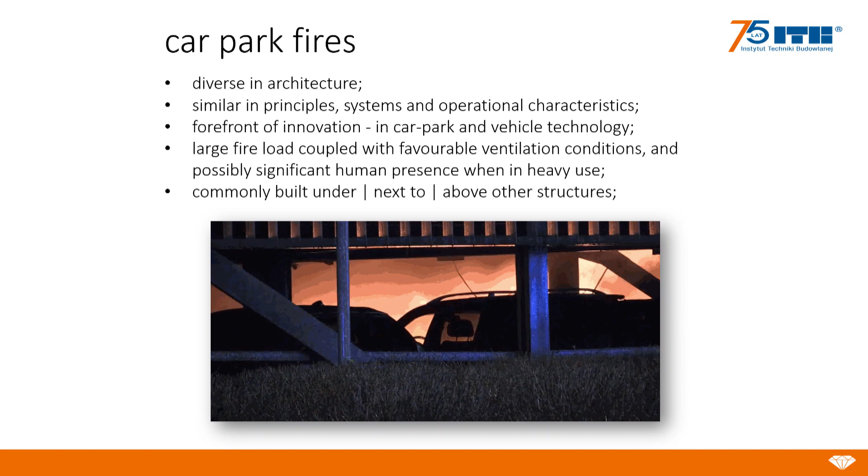Okay, so I like car parks a lot, outside of the fact they pay good. There are some interesting aspects of car parks. If you think about the car park, they all look the same - they all have the same role, more or less the same thing, copied and pasted over every building. So you could expect the fire behavior or challenges related to fire in car parks would be something universal. But it's not. Car parks are really exciting because very tiny, unique features of each car park make the challenges within it very unique.

The fact that in one car park you have the entrance on this wall, on the other you have it here. You may have two entrances, the way the core of the building is positioned - in the middle, at the wall. Is it rectangular? Is it square? How tall is it? What type of structure underneath the roof is there? Are there any changes in the shape of the roof? These all seemingly tiny details make the whole thing completely different in every car park.

So in the end, you are dealing with a space that's actually quite complex, and out of this complexity you have to deal with the complexity of fires within.

The second thing about car parks which is kind of difficult: if you think the role the car park has is for vehicles to be there, and vehicles emit fumes, you don't want to be in an environment contaminated by fumes from vehicles, so they, in essence, must be well ventilated. So we have created a perfect space where you have a confined space which is extremely well ventilated.

If I was a fire, I would choose this space to live in because it's perfect for a fire. So the exact things that make car parks good for the purpose they need to serve are the exact same things that make it great for the fire to grow in.

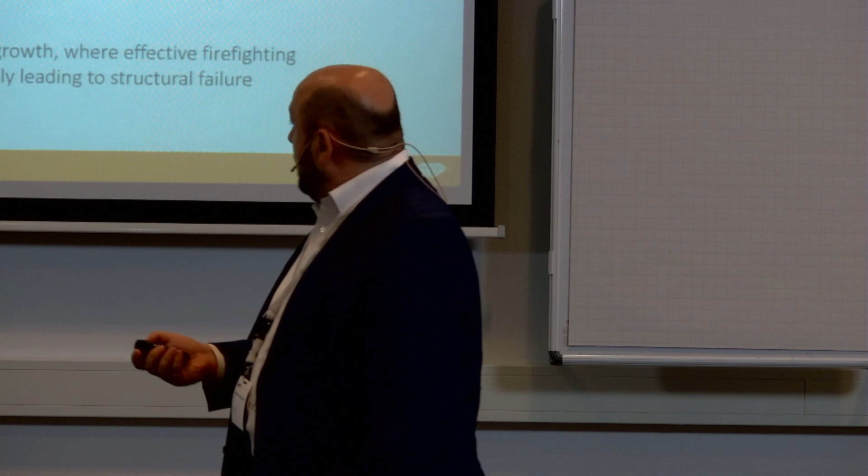Cork fire in Ireland, shopping mall - destruction of the car park led to closure and destruction of the shopping mall, 100 shops closed, major disaster for the local community. Stavanger, Norway, a big car park near the airport, massive economic loss because of hundreds of cars burned. And in Norway they have nicer cars than in Poland, so much more losses there.

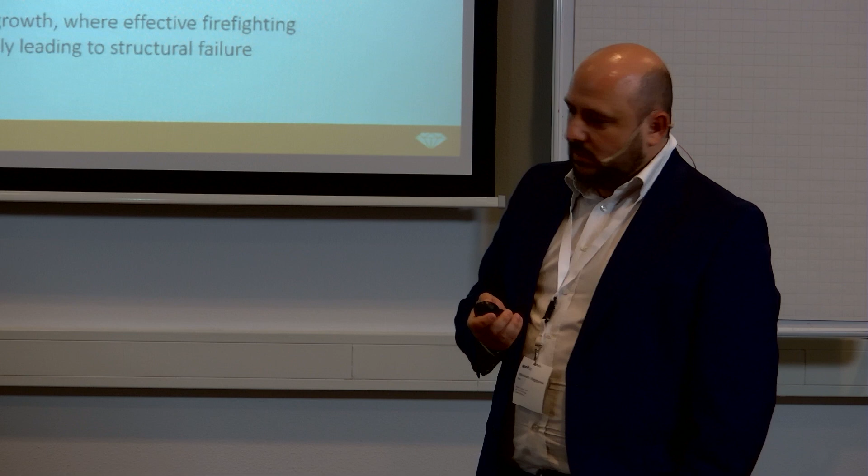And we also had one in Warsaw 2 years ago. It was underneath a large residential building. It happened at 5 a.m. in the morning. They evacuated the building, and people came back to that building only about 2 months ago. They left the building 2 years ago, and for 2 years they were in hotels in other rooms because it was not possible to go back. The destruction of the structure of the building was so profound.

It's actually a miracle they've managed to secure it and refurbish it to the point where it's structurally sound and can be used. And this was a huge demonstration of how stupid fire engineering can be. In Poland, there was a law that if you have a 1,500 square meter car park, you need a fire alarm and ventilation. Guess what was the area of this one? 1499, of course.

So yeah, unfortunately we now have proof that this risk is not something you can go around. It is a true risk factor in your building, and you really don't want this fire to grow to a size where it endangers the building. So that's why we spend our time researching and learning about these things.

From my perspective, what you can do in a car park - probably the best thing is to put sprinklers in it, and that basically solves most of the issues. But in countries like Poland, it would not be a very popular decision because we're not a sprinkler culture country. It's not that popular, and it's an increased cost over other things. So people would do a cost-benefit analysis in their buildings and just put in the things that are really necessary.

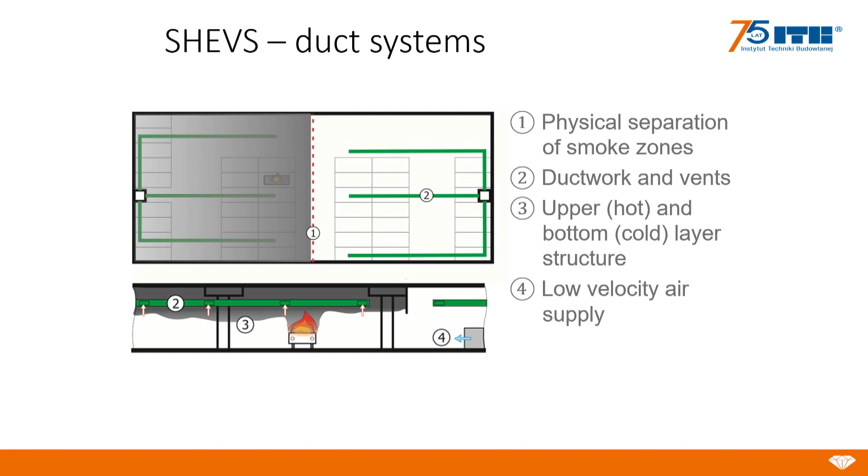And to give you some context for the rest of the talk, in our nomenclature we would consider two major types of systems - I guess it's the same here. One type would be a smoke extraction system with ducts, where you'd have ducts underneath your car park, extracting smoke and fumes through openings, louvers in that duct. You would supply makeup air somewhere in the car park, and you'd expect two layers to form: one being the smoke underneath the ceiling from which the smoke is extracted, and the smoke-free zone at the bottom of the car park, hopefully high enough to allow for safe evacuation or operational procedures of the firefighters.

The main challenge with these systems is to not mix them. That's actually the number one challenge when you design these types of systems: to provide the inlet air with low enough velocity to not create a mixing effect between the cold air, because then you receive cold smoke which will be everywhere, and you lose all the benefits of keeping the smoke underneath the ceiling.

So that would be one type of system used in Poland, and I'd say it's like 40% of the market. The other one would be jet fan systems, which I'd guess is 60% of our market. Most car parks are equipped with jet fan systems.

It was brought to us by Danish people, Novenco, who did the first system in Poland around 2002. It was a nice revolution. Back then ducts cost a fortune, so ductless systems were a really nice thing, and they gained a lot of traction on the Polish market.

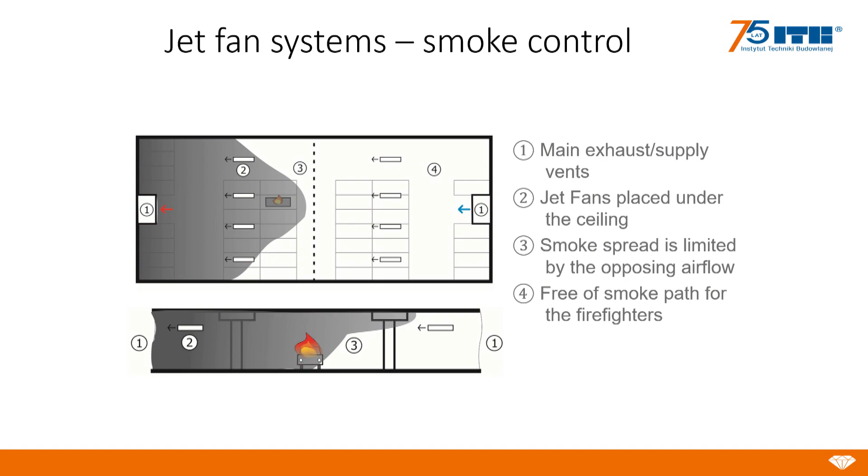The issue is, I'm telling you this to build context for our research. A large market opened for these types of systems, and companies started competing over who could design the smallest system for the building to win the contract. So we very quickly went from large Novenco systems with 500,000 cubic meters per hour extract points to systems with 300, 250, 200 - who could give less.

It was going less and less, and then we at the ITB went out and said, no guys, stop - if we go that way, we'll end up with sanitary-mode systems, not fire alarm systems anymore. We proposed some guidelines in Poland, showed people how to do CFD, and gave them preliminary designs. They wanted to kill us for that because it went against the competitive advantages of some people, but we did it, and it kind of worked.

So we've stopped in Poland at low capacity systems around 180,000 cubic meters, which we call smoke clearance systems - I'll show that soon - and we still have some proper jet fan systems in car parks. So that's pretty much the systems.

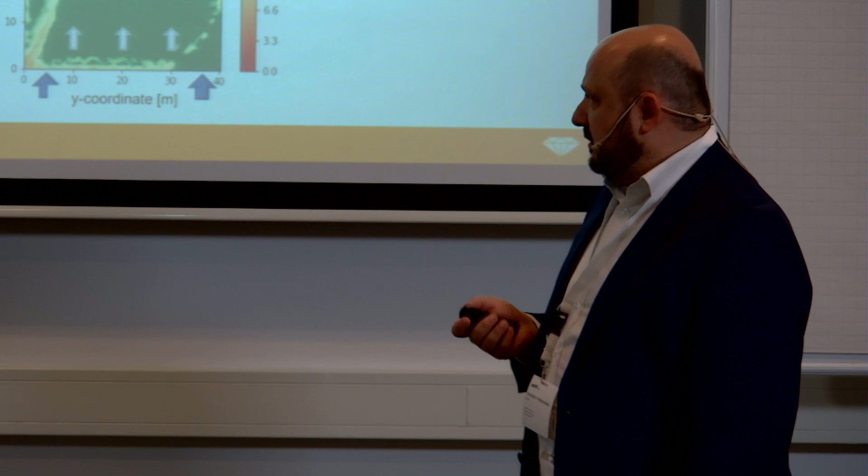The difference in their operation is, as on the picture above, it's the same car park cut at 2 meters height. After some time in the duct system, you get a stable layer of smoke. You assume that as much smoke as you produce is the amount you remove from the building, and by that you receive a status quo where your system continuously works at a certain efficiency, and you'd expect it's not going to change much over the course of the fire.

In jet fan systems, we usually allow the smoke to gather in the smoke reservoir of the car park to not disturb it too early, because that, from our experience, gives a better chance for people to escape. Instead of pushing the smoke on top of them, it's easier to let the smoke spread for a few minutes. We've checked that with CFD to see how long that time can be and what's safe in a given architecture. After some point, the jet fans start, the exhaust starts, and you start carrying the smoke from the inlet side to the outlet side, basically removing it horizontally through the car park.

Obviously the efficiency of the system is driven by the system capacity and the size of the fire. That was the second thing that was very disturbing in Poland - when they ran out of possibilities to optimize capacities directly, they started optimizing the fire source. One guy did CFD for 4 megawatts, the other did it for 1 - guess which system was better? So yeah, it was also a huge pain for us that required fixing, and we did fix it in a way.

Now, before I go into my talk, I'm going to show you the results of our modeling, our research on this subject. But it's not complete - it never will be complete, for the reasons I told you at the beginning. It's always a very unique thing for each car park. And I'm a huge advocate for designing smoke control systems in car parks through CFD. It's annoying, it's costly, but it's necessary. There's no way you can do it otherwise.

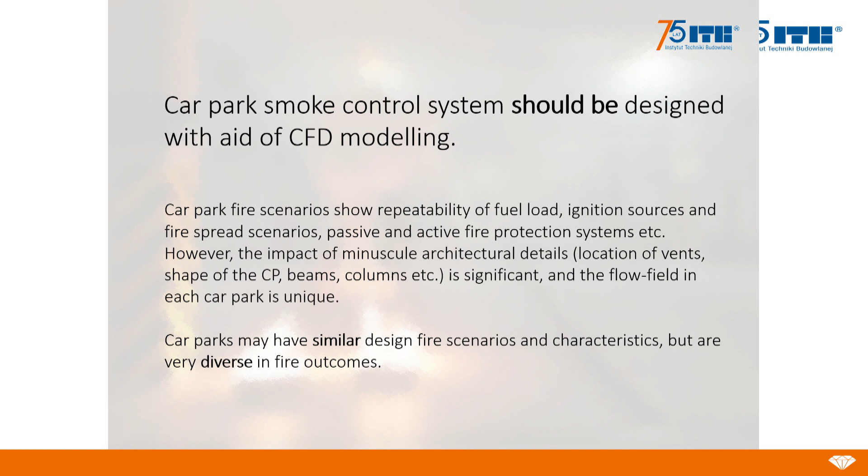There's no way, unless you over-design. Like if you put 500,000 cubic meters per hour, then you're okay without CFD - but that's the Belgian way, which we don't like here, as I was told - which basically means it's the French way. So that's even worse. You need to do CFD for car parks if you want optimized and working systems, and I'm a huge advocate of doing that well.

We have some publications, some preliminary work I'm not going to cover much here, regarding jet fan performance and whether you need to model obstacles in your car park. That was always a question we've been asked a hundred times, so we eventually did a CFD analysis with Monte Carlo to show that obstacles in your car park don't really have a big impact on the qualitative outcome of your analysis, which was a great thing. If we found otherwise, we would not publish it. So we're happy with that.

Let's jump into the subject of today: what matters when you ventilate the car park? We started asking that question and seeking answers around 2017, when we did the first parametric study.

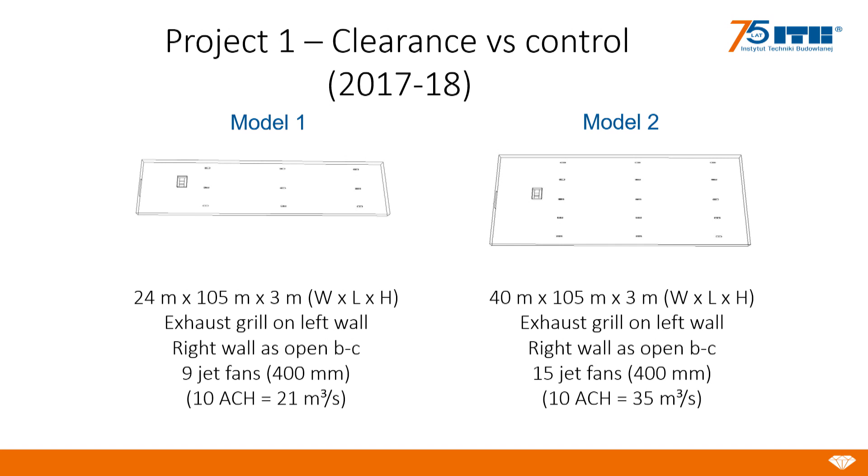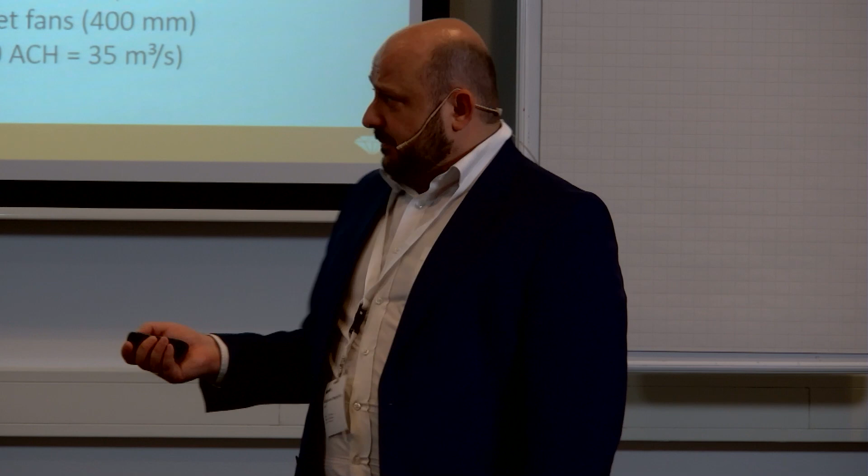We wanted to see, with a car park fire, in two different car parks—one narrow, one wide—and the heat release set at different levels, from 1 megawatt up to about 16 megawatts, the biggest we modeled. We had a system based on jet fan extraction and inlet—the simplest jet fan system you can have. How would the performance of that system change as you changed the operational points, increasing capacity, and how would it change as you changed the power of the fire source?

Would the system still work if the fire were twice as big? That was a really tough question to answer because we had no idea back then. And we very quickly observed fundamental differences between different quality or different sizes of the systems.

As I mentioned, we started calling them clearance systems and smoke control systems in Poland, as a nomenclature we introduced to our engineers. The clearance systems were meant to remove as much heat and smoke from the car park as possible, to allow firefighter operations inside—assisting them, not enabling them. The smoke control system was supposed to create conditions where all the smoke stays behind the fire source, so you enter the car park in smoke-free flow and can get to the car on fire and extinguish it. That was the objective of control.

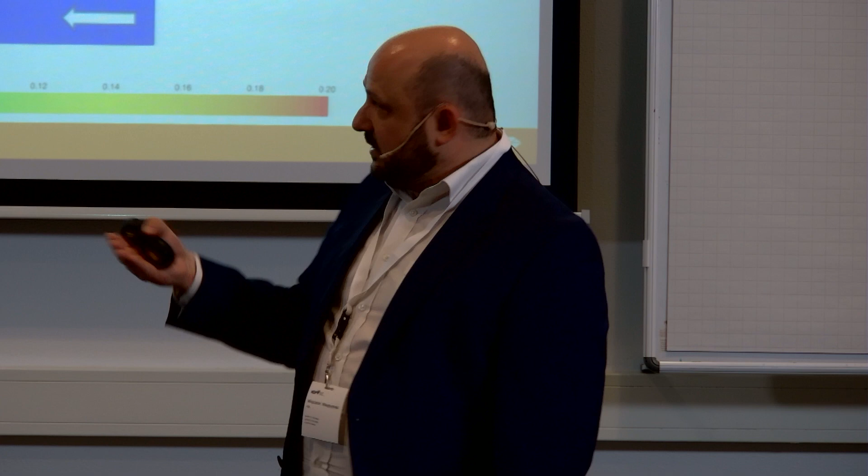However, this picture doesn't give you all the information, because the smoke—the substance emitted by the fire, the soot and conglomerates—has very nasty optical characteristics. It takes very little of this substance to obscure visibility. I'm showing smoke concentrations of 0 to 0.2 grams per cubic meter, because that's where visibility relevant to humans is. But in a car park fire, concentrations can reach 2.5, much bigger than this. It takes very little smoke to obscure visibility, so it's a parameter that rapidly drops to zero or close to zero, and you lose your ability to investigate which part of the red area is worse than another.

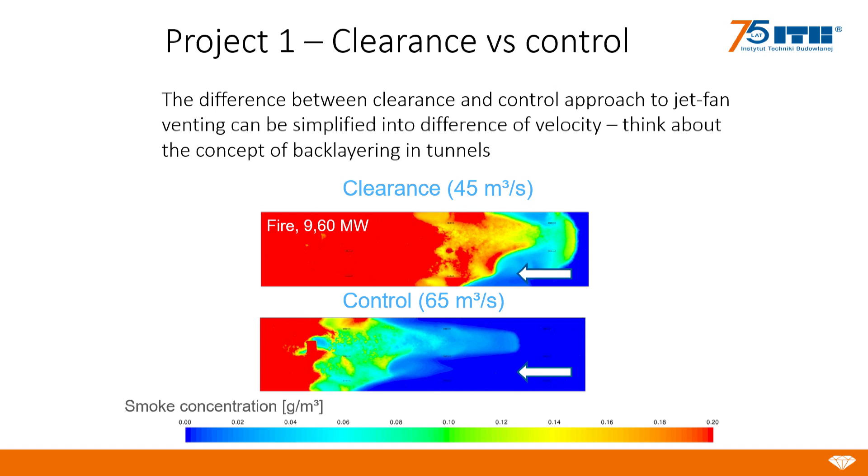Of course, it will have an effect of disorientation, and it will be very difficult to find the source of the fire. But it's not - it's something that lies within your operational range that you can equip with personal protection devices, go in and sustain. So this system, despite the fact it doesn't stop the smoke, it actually really does well in containing the heat. So that was for us very important.

Not every building has to provide these conditions. Sometimes this is sufficient to okay a building, especially a residential building, where the costs of going from this to this would be tremendous.

We have, obviously, as I said, this multiparametric analysis, so we've investigated it with many points of operation of the systems, increasing the capacity, increasing the fires, to really look for that signature - when clearance becomes control, when control stops being control and is just a clearance system.

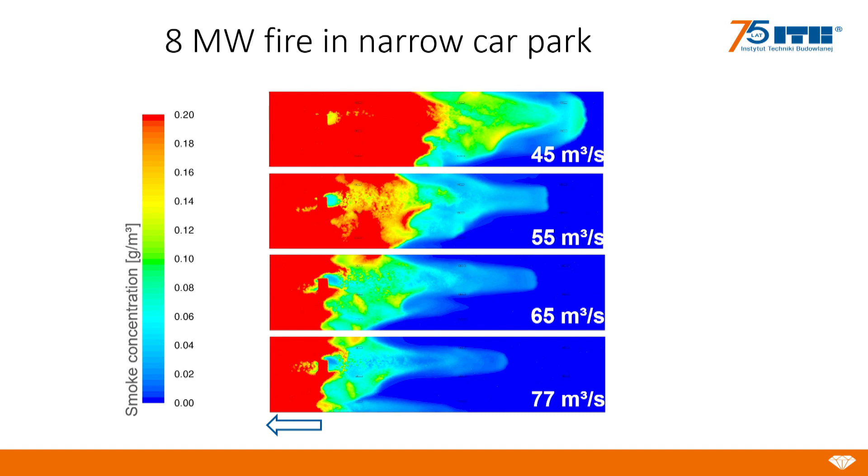More of this car park is filled with smoke. But it's not that we've lost the capability to control the smoke in the area, or the capability to control the temperature and energy balance in that area - it's just a bit worse. And the bigger the system were, the lesser the effects of this increase. So not only are you increasing the performance of your system at some given stage, but you're also increasing the resiliency against bigger unforeseen design scenarios.

We thought that it's a good finding, but designers thought otherwise. They want to design for the minimum. Anyway.

It's also interesting because when you venture into bigger car parks, wider car parks - this one is perfect for jet fan systems, it's narrow - if you go to bigger car parks, to stop smoke here you would need to create a certain amount of flow, a certain flow velocity even, that is big enough to countermeasure the forces in the smoke, the buoyant force of the smoke that wants to move this way. So there's like a balance of two forces in this point, and you want to overwhelm the smoke, then you can control it. If you don't, you get this.

So obviously, if you have a fixed point in your system, you extract 50 cubic meters per second in your system, subdivide that by the area, and you have more or less the average velocity in this space. It must be high enough. Now, if you wanted to design for this velocity, you would get really huge values of extraction capacity, because even 2 meters per second on such a huge area is unbelievably large - something we would do in tunnels, not in car parks.

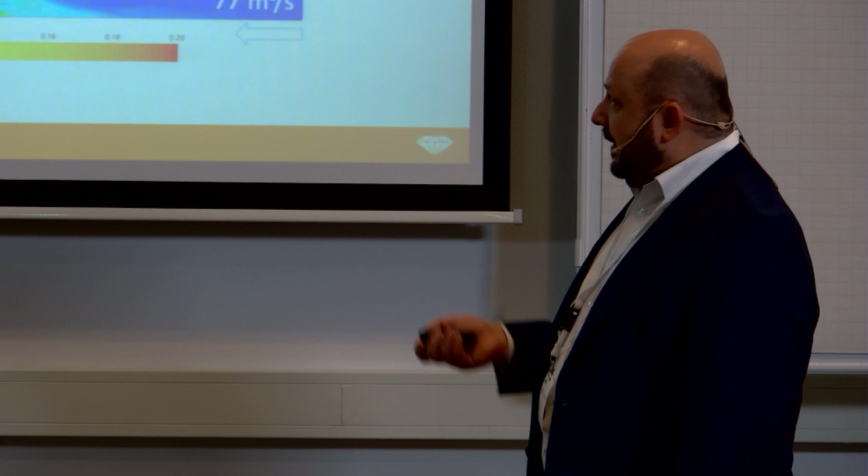And as you build your car park, as it grows, you can really see that effect - something that has worked, remember 4 megawatts in a narrow car park, up to well, this one horrible, this was okay-ish, this were perfect. Here, the performance is completely different at the same capacity. So we did this to show people who focus so much on capacity, and were designing systems for a capacity point.

They were calculating that in every car park you need 200 cubic meters, 200,000 per hour, and assumed it's good. No, it depends on the car park—in one it will be great, in another it will be horrible. So we wanted to show them that this performance is completely different once you start making the car park bigger. As you can see in this picture, the performance is completely different than in the narrow car park, and at larger firepower it's even worse. But still, some of this performance was acceptable.

The next thing we wanted to see in this preliminary research was the effect of jet fans. People highly misunderstand the purpose of jet fans in jet fan systems. A jet fan is not the device hanging above my head that transports smoke from here to there, and it's not something that acts just in front of it. It's something that acts maybe 30 meters away, where the stream of the jet fan is big enough to cover the whole space of the car park.

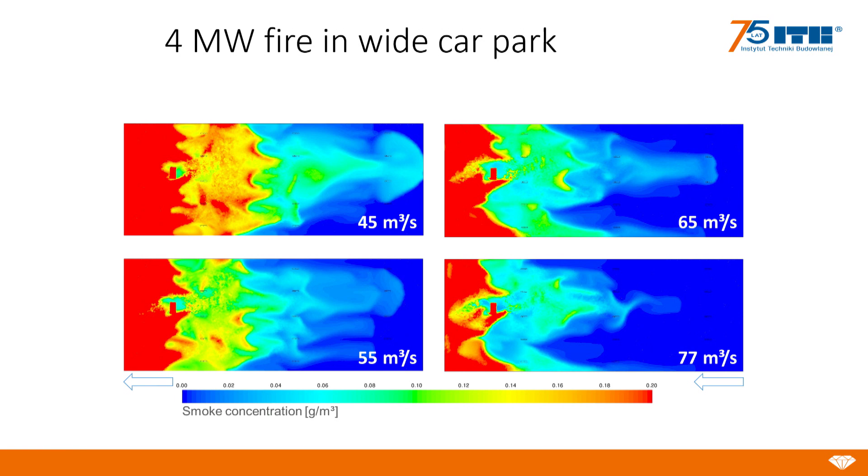This is why you see these beautiful shapes in my simulation. This jet fan makes its effect here; the jet fans somewhere here make their effect there. It takes distance for the stream to spread before it starts to make sense. It's like if you wanted to blow leaves from the ground with a leaf blower or a straw—if you push too much in a very small space, you're not going to move things. So jet fans move air at a distance, and their main role is to make this movement as uniform in space as possible.

An obvious approach for some designers was to optimize the systems. What is the number one most expensive element of a smoke control system? It's the space on the floors taken up by your ducts. If you need a 5 square meter duct through 10 floors, that's 50 square meters lost that could otherwise be sold—that's the biggest cost. People really hate optimizing for larger cubic capacities of their smoke control shafts; they'd rather find solutions elsewhere.

Many of our colleagues, designers, tried to optimize by putting more jet fans in the system. So, okay, if we have bad smoke behavior in this place, let's put a shitload of jet fans here and it's going to be great—they're going to blow it away. Well, no, it doesn't work like that. A jet fan is a momentum transfer device: it transfers momentum from the blades to the air, it just pushes the smoke, transfers a force.

If you don't have any jet fans in your car park system, here at 55 cubic meters per second—you've seen this image before, this same car park simulation—at a very large fire, you want to balance the forces. But if the force of the smoke is too large and the counter-force too small, they don't battle, they just slide past one another. So you'll have a lot of smoke coming back from the top of the car park and cold air flying underneath, because that's the path of least resistance—your smoke moves up as far as it can.

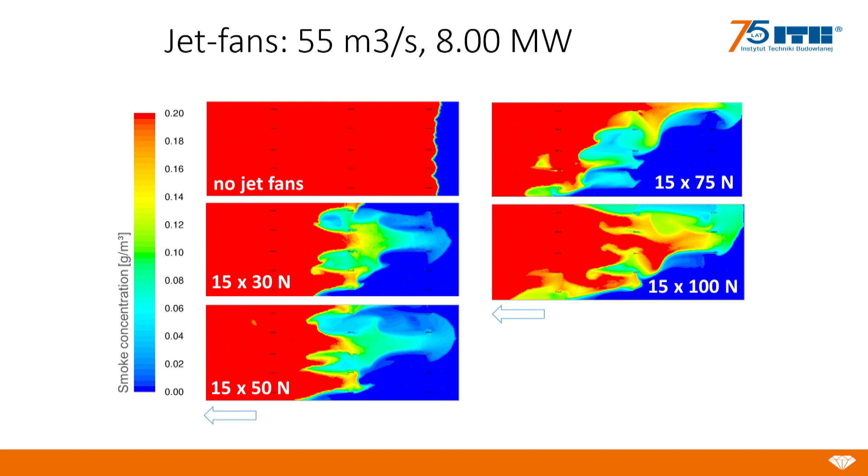Now what happens if you put more jet fans in? You start to overwhelm the amount of air you extract—it can't take all the momentum you've transferred into the air, so that flow has to go somewhere. In this case it went around the wall, moved all the way back, and created this very unfortunate pattern of smoke flowing backwards despite you blowing more on it. At 100 Newton jet fans it's even worse—by doubling the size of the jet fans, we made the system doubly worse. So there's a balance you need to find, and that's another reason for doing CFD in your calculations, because there's no good way to calculate that on paper.

I know some ways, they're very unreliable, CFD shows otherwise. So there's no really good way to do that. But it's necessary. Otherwise, you're going to overwhelm the system in the car park, and it's not going to do the thing that you want it to do, which is removing smoke.

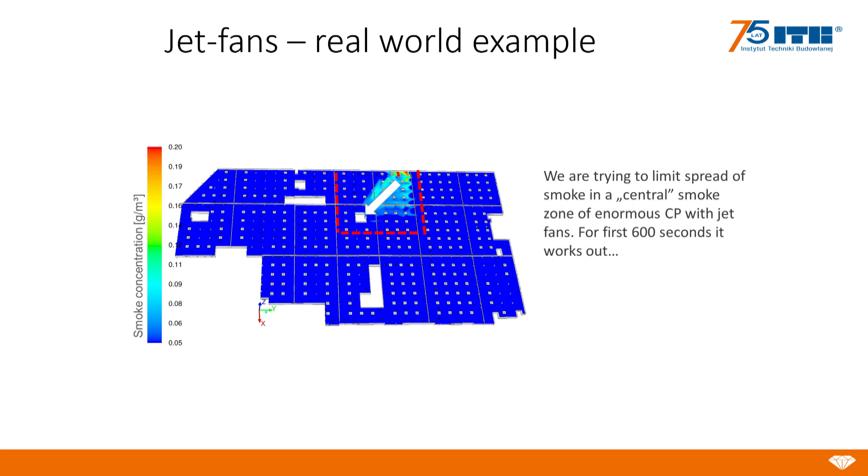Let me show you a practical problem. We were designing a large car park underneath the shopping mall with jet fan systems, and because we wanted to subdivide it into smoke zones, we ended up with this funky smoke zone with 3 open edges. So we were super smart - let's cover it with jet fans all around, and we did. And what it did to the system, instead of smoke going to the extraction point, it was going everywhere, because you cannot overwhelm the system with the amount of jet fans.

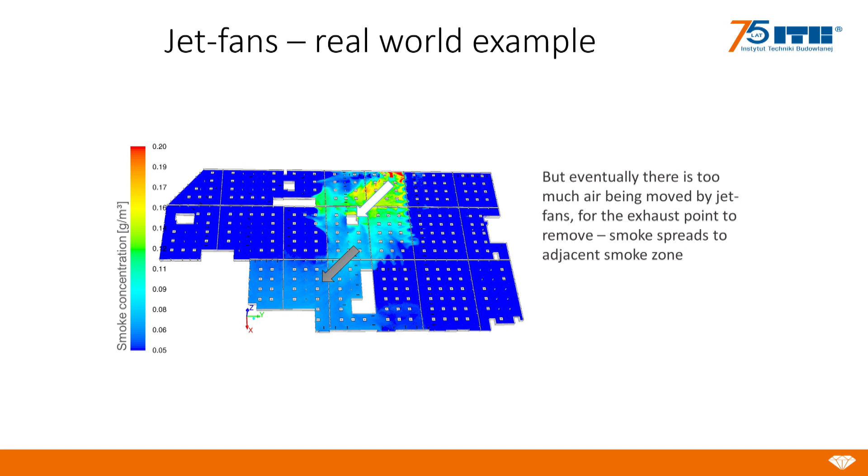When we used less jet fans, when we turned these jet fans off, it worked. You just had to really control at which location, which jet fans you start. But it's not possible to simply throw a bunch of jet fans and expect it's going to work. It's not going to work like that.

So that was the initial project in 2017, in which we, for the first time, really touched the subject of what matters in the system. But it was very interesting - it left us with more questions than answers, so we pursued it further.

We moved on into a second project, in which we designed a car park, 40 by 60 meters, quite a large car park with a fire in the middle of it. We've designed it with ductwork systems and jet fan systems, and we did CFD the hell out of it. We have performed, if I'm not wrong, 480 different CFD simulations for this car park at different setups to really understand how different variables change the outcome of our modeling.

Some interesting facts - it took us 78,000 hours. Actually, it took like twice that, but I cannot tell that to my boss because he's gonna kill me. We've started like 200 simulations and forgot to start the fire in them. Yeah, that happens more often than you would like.

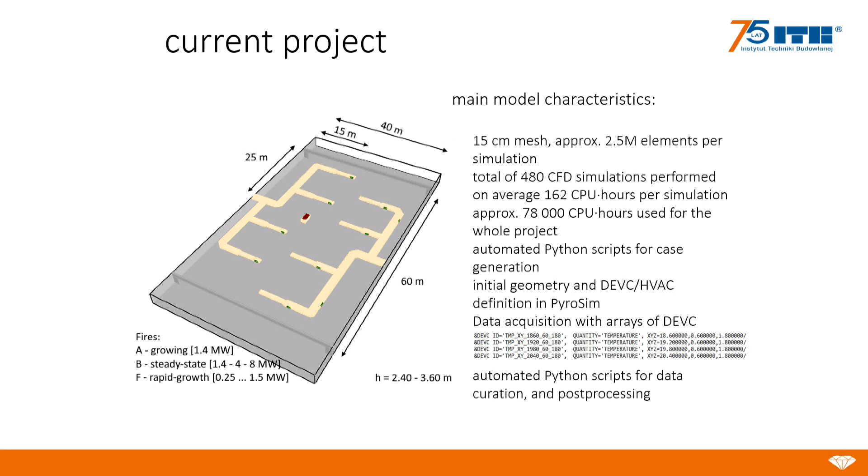In this project, we have varied stuff related to architecture, stuff related to fire, stuff related to smoke control. From the architectural side, we have chosen the height of the car park as the variable we want to look at. So we've had horribly low car parks, 2.4 meters, up to 2.7, 3, 3.3, and 3.6 meters. We've repeated the calculations for each of these heights.

From the design fires, we've used Jean-Baptiste Schleich fire, we've used alpha T squared fire, we use rapid fires. You're going to see about that later in the talk.

So we took the famous TNO curve that everyone likes and enjoys - that was our fundamental source of fire. But we will focus on modeling this early part of the curve in relation to the growth of the fire. So if we want to investigate the consequences towards the evacuation, we were modeling the beginning of the curve.

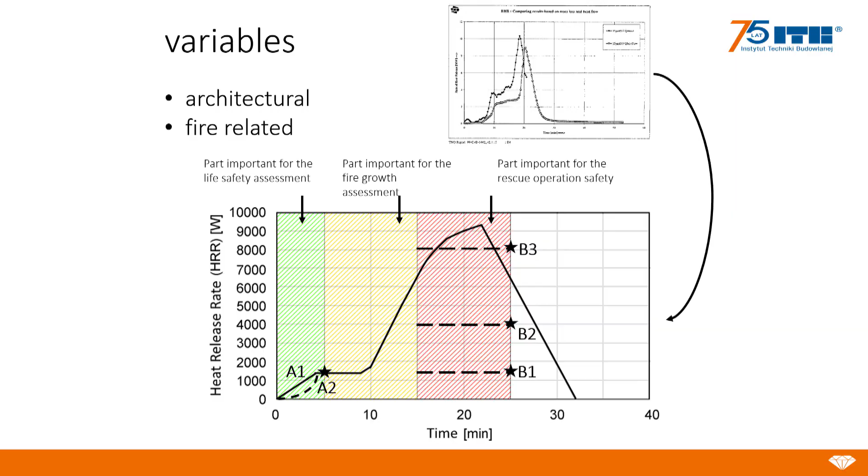We skipped the part that's boring, and we went into steady state fires that correspond to 1.4, 4, and 8 megawatts as some sort of steady state fires to understand the conditions in the building when the firefighters would come at some point. So those were the fires.

And for the systems, we've again investigated duct systems and jet fan systems at different points of operation. We had a car park where there was no exhaust, it was just an open wall, so you could blow all the way through it. And that was a lot of systems, and it was very interesting.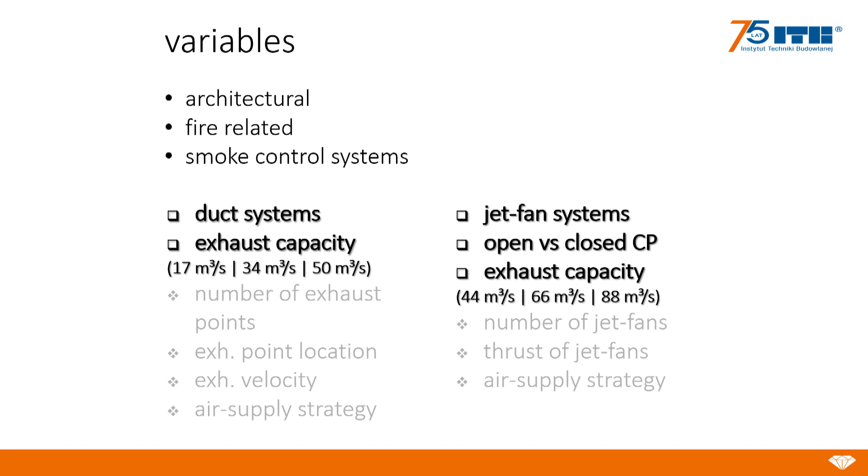The amount of variables and changes in the model to be implemented in this project was so overwhelming, we had to resort to coding to actually do the simulations. So we wrote in Python a preprocessor for our simulations, which would build the FDS models for us. And that helped us carry out these hundreds of simulations.

So we built the geometry, we built the preprocessor, and we told it we want this combination of variables, pressed enter, and it popped out 480 scenarios to be simulated on the computer. Obviously, it was quite a lot of work, but in the end, it was better than writing 480 cases in FDS, which would probably kill me if I had - I'm dying after 3. So that was very helpful.

And the same thing was for post-processing. So to go through the results, if I just wanted to open every one of them and watch for 10 minutes in Smokeview, it would be in general something like 2.5 days of looking at Smokeview, which I'm also not the biggest fan of. So we had robots do that for us.

We have received every single possible outcome. That was quite funny to plot them on one plot. So, not a very meaningful plot, but a very colorful one, and I like it a lot. Literally every single possible outcome, from the absolutely smoke-filled car park to a car park that's pretty much free of smoke and very good to be used.

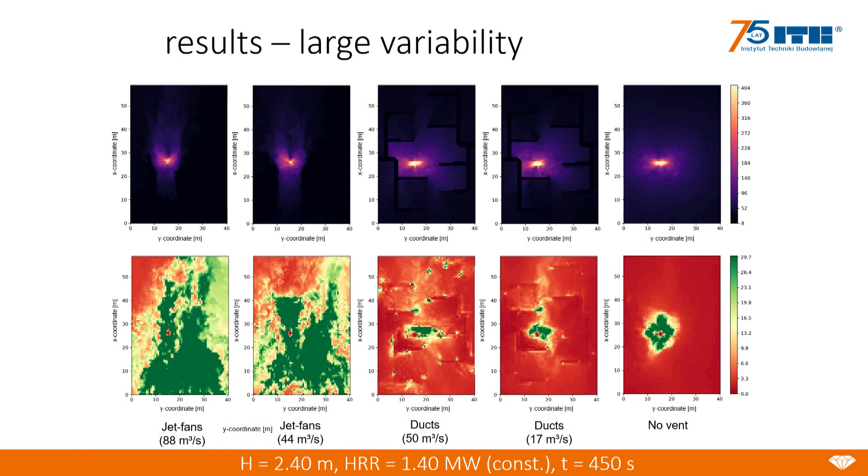So we've covered the whole spectrum of performance of different fire systems. We have observed large variability in the results. Here, for example, you have a small fire of 1.4 megawatts at the very low car park, and we have received a plethora of results for this single case, from jet fan systems at very high capacity that basically cleared all the way through the car park because of the low heat release rate and huge cubic capacity, to duct systems which are not very different from no ventilation at all.

So we have received really a lot of different outcomes from our modeling, which made us really happy, because that meant there are variables that differentiate why this looks different than this one, from systems that are perfect to systems that call for Batman for some reason.

Obviously, as the heat release rate grows, as the fires get bigger, the differences were less visible. So we've also identified at some point the moment when the system stopped working, to identify when they really lose the performance.

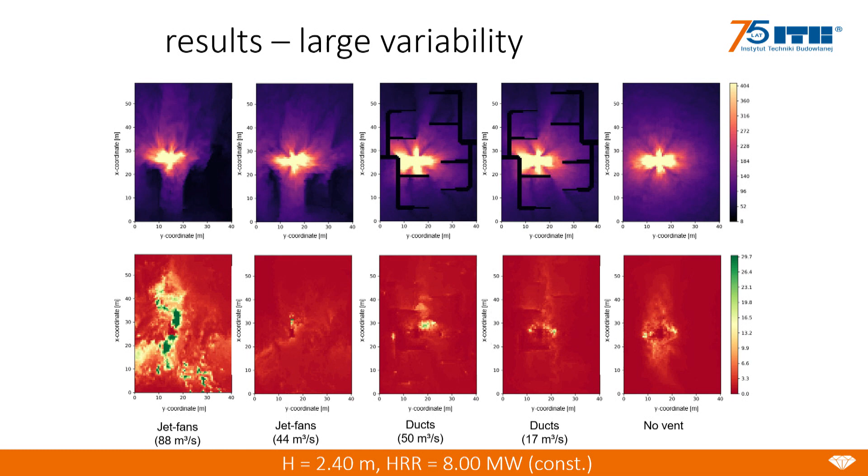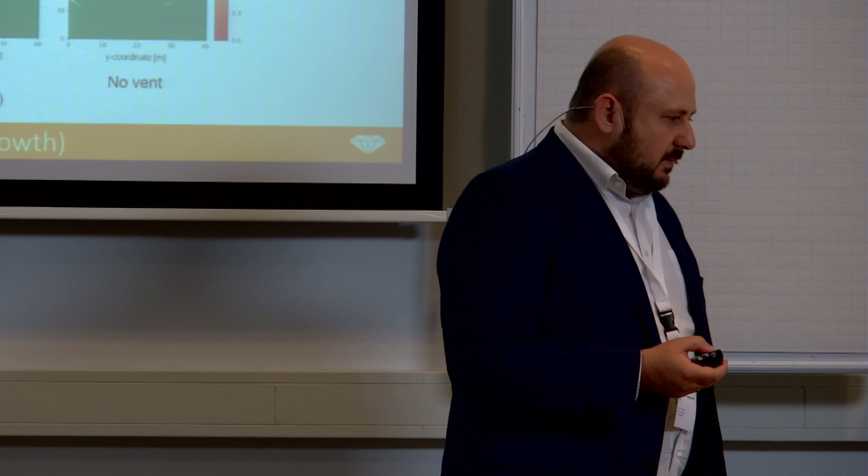So if you look at the car parks with a very low ceiling, on these time-space plots, I've marked the lines which would be from 3 to 5 minutes, which from my experience would be the evacuation time of the car park, depending on what pre-evacuation time distributions you would choose. So the 3 to 5 minutes is something that we feel comfortable with as the evacuation time of a car park. Red means there's smoke in the car park everywhere.

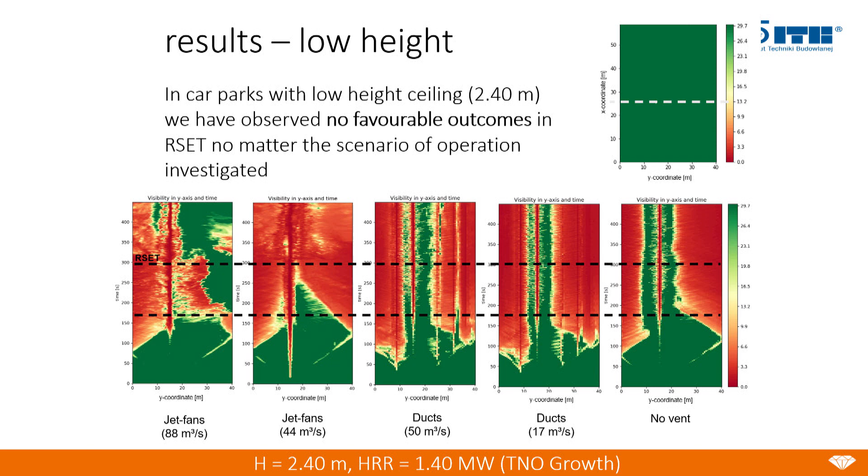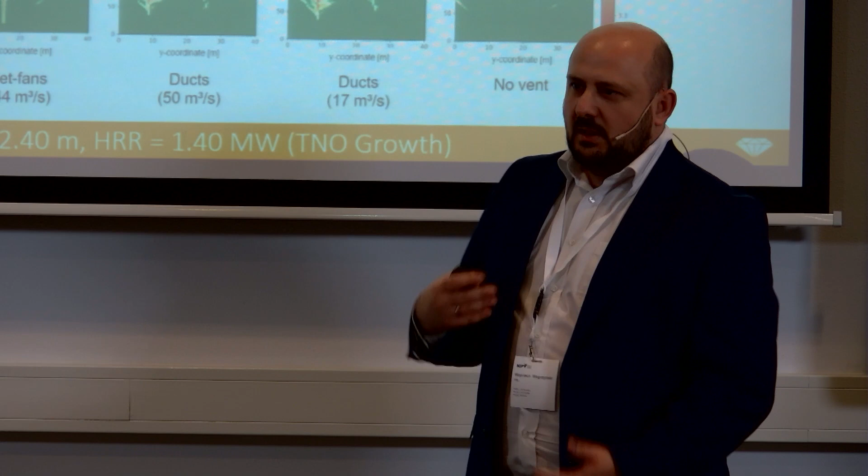And with jet fan systems, in which we purposely delay the initiation of the system, it's obvious you're going to have smoke underneath your ceiling for a good time, no matter the size of the system. Here, the extraction points were working, it's just the jet fans were not working, and then we start the jet fans - it's related to our beautiful law which forces us to do that.

In ductwork systems, even the high capacity ones, they could not save the car park. It was filling with smoke very quickly. Actually, in a way, as a paradox, without ventilation it was even a little better than with very powerful ventilation, because of the disturbance this creates.

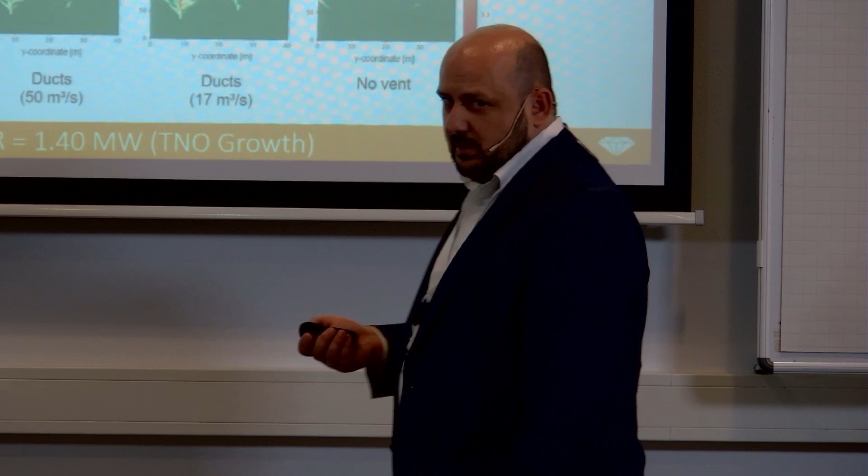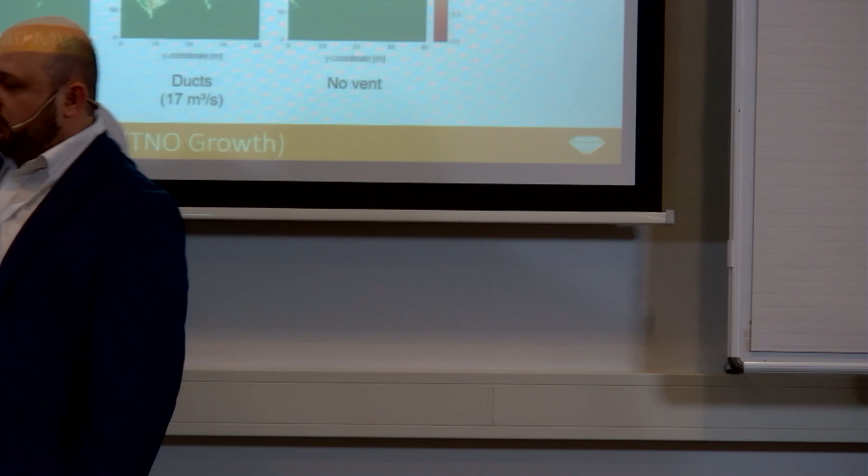So, in a very low car park, we have obtained very bad results in terms of capability of people to escape. In every one of these cases, most of the car park is red, which means it's filled with smoke in the time in which you would like to escape. So definitely a very bad outcome of a fire.

Now, if you start combining that with changing the height of the car park, some really interesting stuff begins to show. Even at the very low capacity system, 17 cubic meters, that's a very small system, but with the growing height of the car park, you start to receive some pretty good outcomes. Whereas in the smallest car park, after 90 seconds, you already would be in smoke.

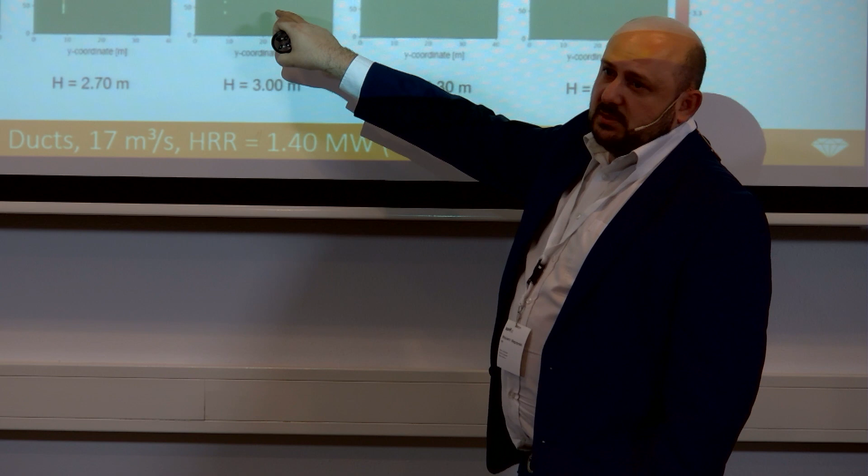Here, at 270, this is only at the edges, at the walls of the car park where there's recirculation. But most of the car park is smoke-free. At 3 meters, it's almost completely free in the evacuation phase outside of these really tiny spaces. At 330, completely free. 360, completely free.

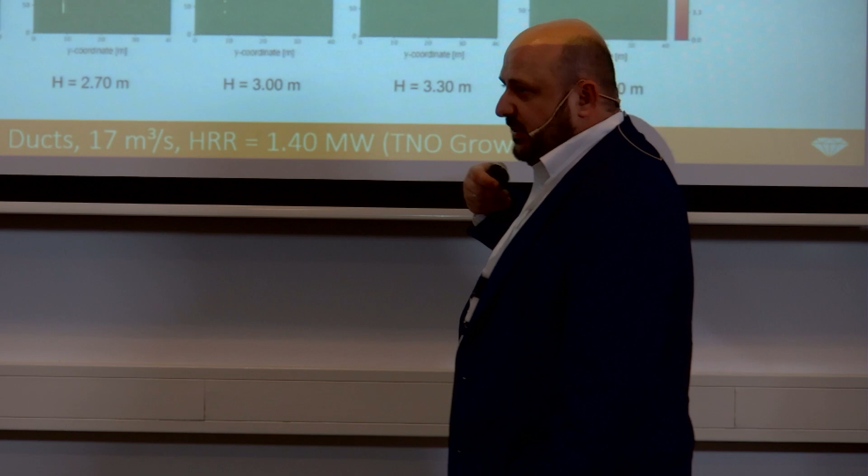So by simply changing the height of the car park - it's not a simple change, I know - you can see how completely different the performance of the system is with this change. One interesting thing about this: it's all for the same cubic capacity, 17 cubic meters per second. If you go to design, how we design these things, you would calculate the amount of smoke in your smoke plume and assume that that's the amount you need to extract.

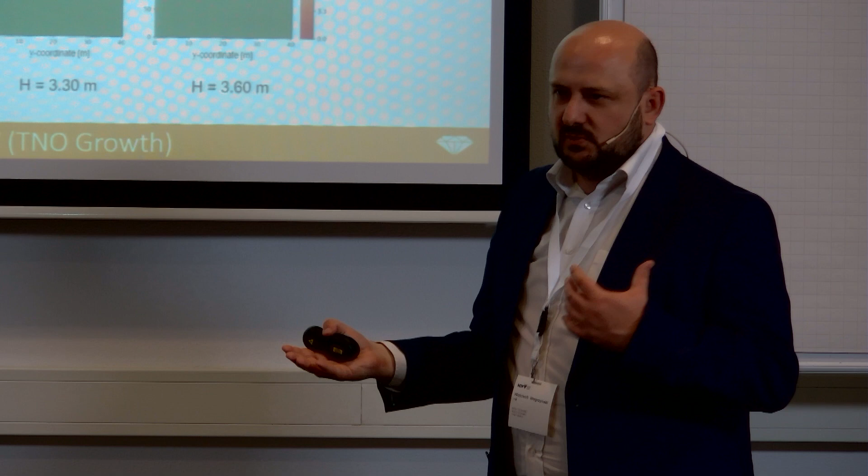You would usually assume that your smoke-free layer is at 80% height of your car park or some other artificial value. So if you make the car park taller, you get bigger entrainment, so you'd have to design bigger smoke control systems. In a way, you're penalized for making a bigger car park because you need a bigger system to match it. Well, that's not quite right. If your car park is higher, your system becomes more efficient because the smoke reservoir is bigger and it's easier to extract smoke from it.

So at which height is that smoke plotted, Andrea? This is plot at either 1.8 or 2 meters. I think it's at 2 meters, which makes sense because if you have a 2.4 meter car park and measure at 2 meters, the smoke layer will be at 1.5 meters. But we design car parks for people to walk out, not crawl out of them.

Is it standard in Poland to design these kinds of systems for evacuation purposes? Yes. Because at home we typically don't do that. It's not ours. Yeah, but we care about people. I'm sorry.

It is common to design this. Technically, we have a performance-based law that says smoke control systems should be dimensioned so it's sufficient for humans to evacuate from the building, with sufficient makeup air being put in. So evacuation is directly within our goals, and we care about that.

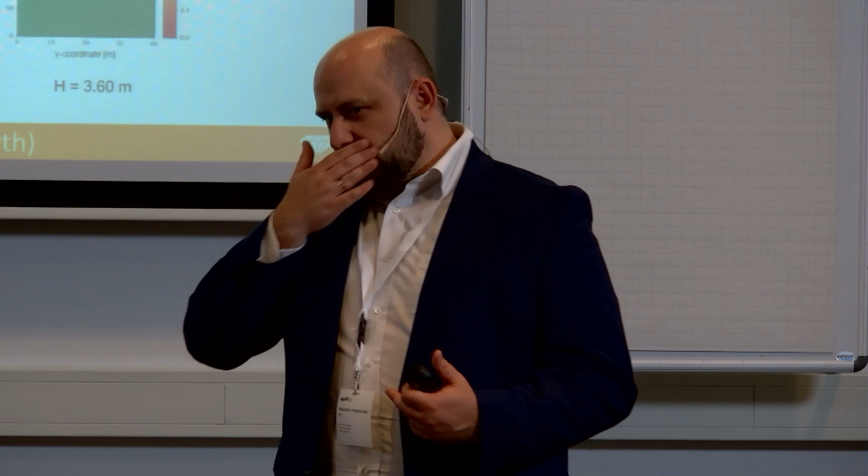I agree it depends on the type of building. If it's a residential building with 3 people in a car park, it probably doesn't make sense. If it's underneath a shopping mall on Black Friday, it probably does make sense because you may have 1,000 people in there. So it's all contextualized, which we also fail to have in Poland, and we can't participate in the discussion now because they kicked us out. They don't like us. But yeah, it is sometimes irrelevant.

However, I still find it interesting that you can improve life safety by increasing the height. And even if you don't care about it as your primary objective, it's great to know.

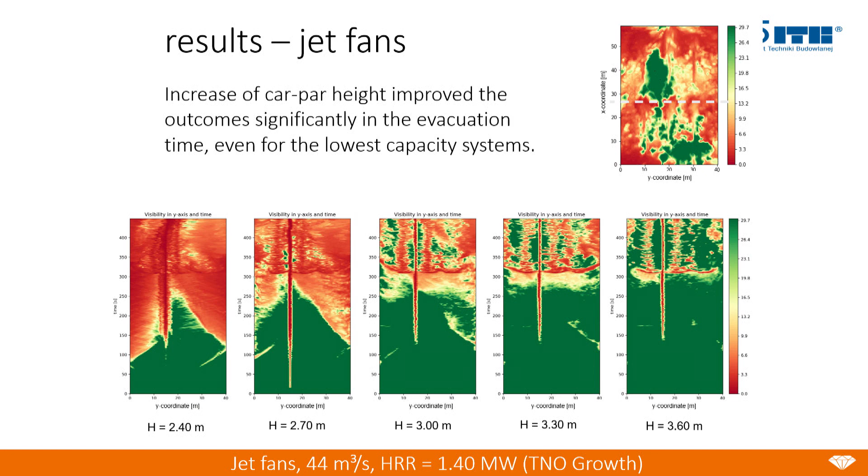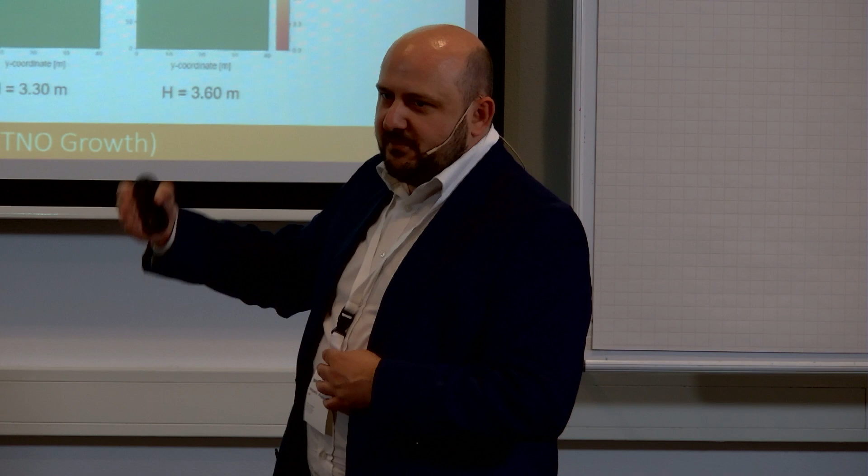In jet fan systems, we observe the exact same thing: increasing car park height increases system performance. I told you about this balance of forces and the amount of air you have to push through the car park to achieve it, related to the cross-sectional area. So the higher the car park, the bigger the cross-section, the smaller the velocity, right? Well, we've observed that because of the smoke's lower temperature and increased entrainment, the buoyant forces become so much smaller that the system becomes more efficient. It has lower average velocity, but less is needed.

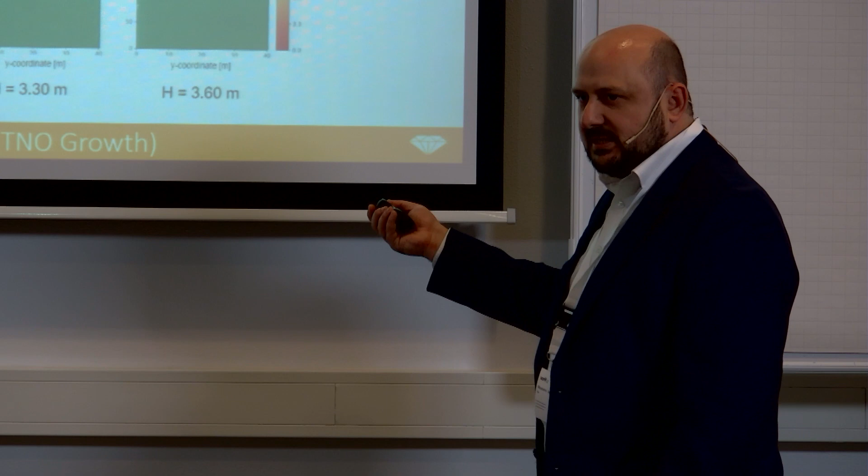So it's not that you need to increase the capacity multiple times, because if you increase the height from 240 to 360, you still achieve better performance of the system. So from our perspective, that was a very important finding.

If you combine them all, which you probably can't see the green points, they're here. That's the mean visibility in a car park after 7 minutes of full-size fires of 1.4 and 8 megawatts. Here you'd see the difference between the systems. The most interesting finding is that with the lowest car park height, you can barely distinguish the points on the plot, they're all clumped in one space. Here, they're scattered. This means that if your car park isn't high enough, you can barely tell the difference between the systems. You cannot put in a much larger system and hope it will work, because it will not.

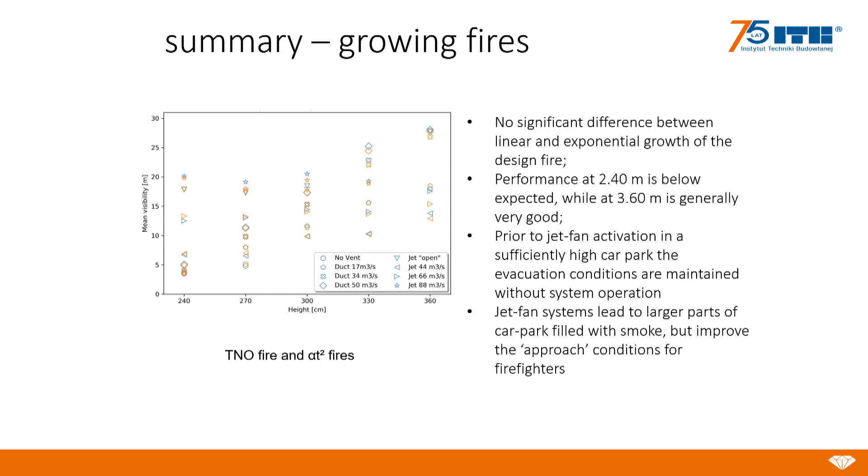You cannot overcome the limitations in the size of your smoke reservoir with just the capacity of the system. You only start to see differences when the car park is tall enough. That's something we consistently observed in this study: only once you implement a certain height of car park do you start to achieve good performance of the systems, and then you can truly engineer the system to that certain space. This study was very important for us because as engineers who design smaller and smaller ventilation systems, we'd have fellow architects who design lower and lower car parks, as low as possible.

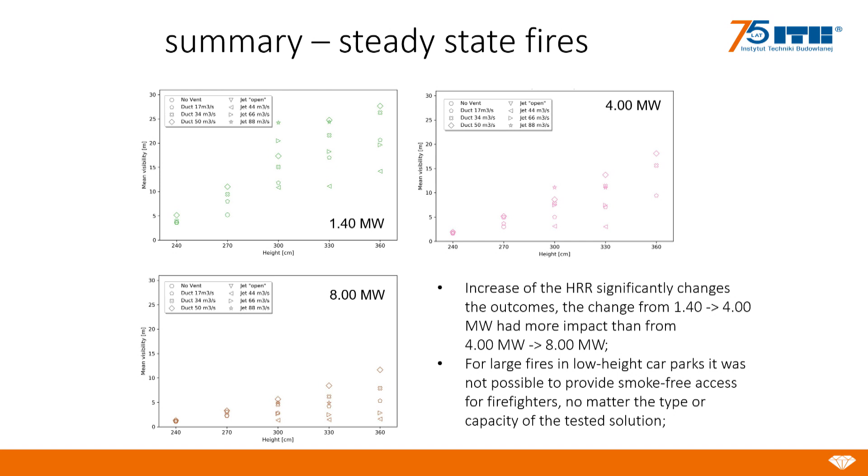And we wanted to show them, no, there is a safety limit. If you want this car park to be a part of a larger building complex, please make it at least 3 meters tall, because then we can work with it. Then that is the point where we can actually provide safety.

So that was an interesting aspect of this study. But in the meantime, there was another thing happening: a fire in Shanghai, where a nice white vehicle quite quickly ignited. Observing media and images from around the world, we realized that electric vehicles burn in a slightly different manner than everything we know. And I don't know about you, but seeing this growth of the fire scares the hell out of me as a designer, because my design is not that design.

That is not my design. That's not my design fire. I don't know what that is, and I don't like it, but it's not my design fire. And I'm responsible for the car park that I've designed based on my design fire, because I told people this is a design fire that is representative of the threats in your car park, and they believed me, and this is not the thing. So we started to wonder, how much worse is this compared to design fires that we commonly use?

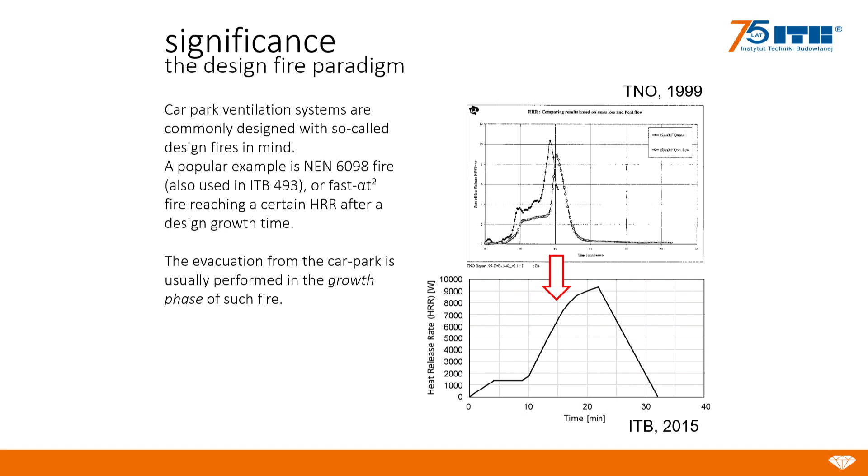How does this differ in the outcomes compared to these fires, and can we actually do something about it? Because let's play we're fire systems in this car park. So the fire is growing.

You're a detection system. No, not yet. No. Maybe first beep now. Someone deleted it. Second beep. Second sensor. And this thing is already huge. You want to start your smoke control? Okay, let's close the dampers on the sanitary modes 1 minute from now. Okay, let's open the dampers. Okay, let's start the fan now. 3-4 minutes into the fire, where this car is already in inferno.

So it's not that our systems can really react quick enough for this. So we're really intrigued in how this changes the environment around us.

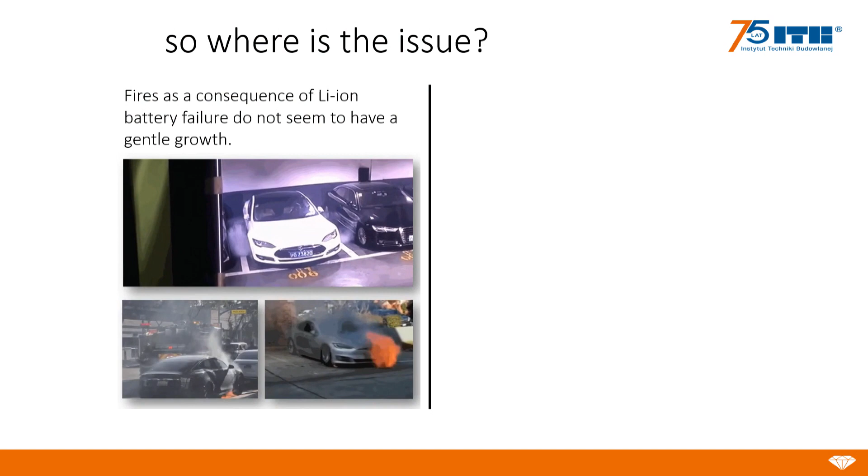Because people came to me and asked me, Wojciech, do we need to design car parks for electric vehicles now? And I told them, well, unfortunately, we've been doing that for 30 years. We just didn't know about it. Because it's not that we can stop people from entering car parks with electric vehicles.

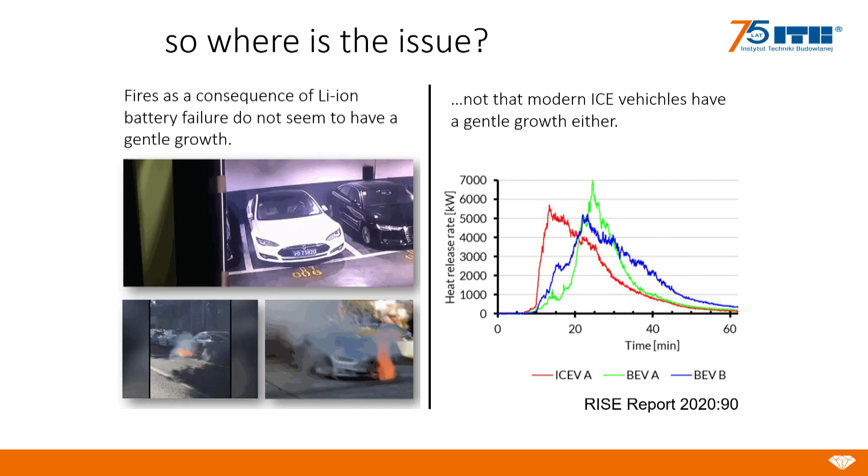We tried to do that with LPG vehicles in Poland, and yeah, it doesn't really work, telling people to not enter the car park. They kind of ignore it. But to be quite honest with you, these are not the only fires that can grow this rapidly. There were experiments at RISE where a combustion vehicle burned even quicker than an electric vehicle. It has to deal with the fact they put fire directly underneath the fuel tank, so it could have been expected. But still, there are scenarios in which our vehicles can burn as fiercely as these ones.

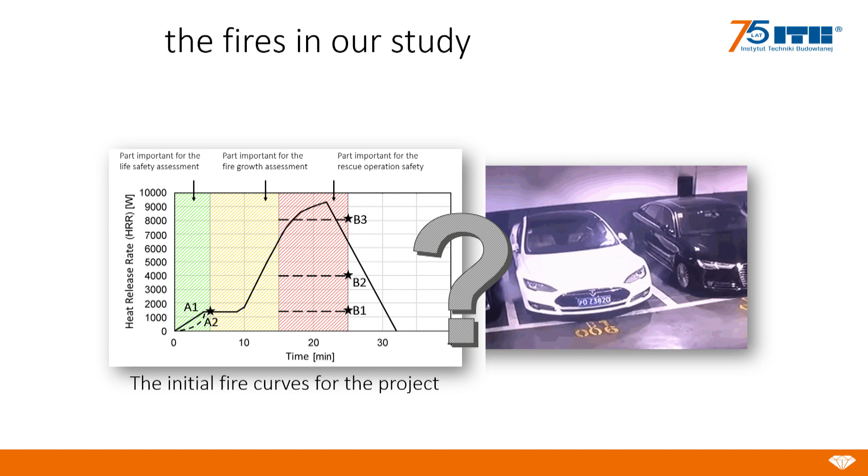So obviously, these curves don't make sense for electric vehicles because the way this starts is completely different. Our idea was, okay, we have no idea what's the size of this. We have no idea how quickly it develops from the moment it goes into thermal runaway into full fire. We have no idea what the jet flame dynamics are in this case.

The best we can do is just simulate a very quick fire. Take our normal fire and just make it grow super quickly to, in a way, represent this immediate threat that this introduces to your car park. And this is how we've built 6 different heat release rate curves for the purpose of the experiment. Because at that point we had no idea what the heat release of that jet flame would be, and we still do not have a good idea yet. People are working on that, but no answers yet.

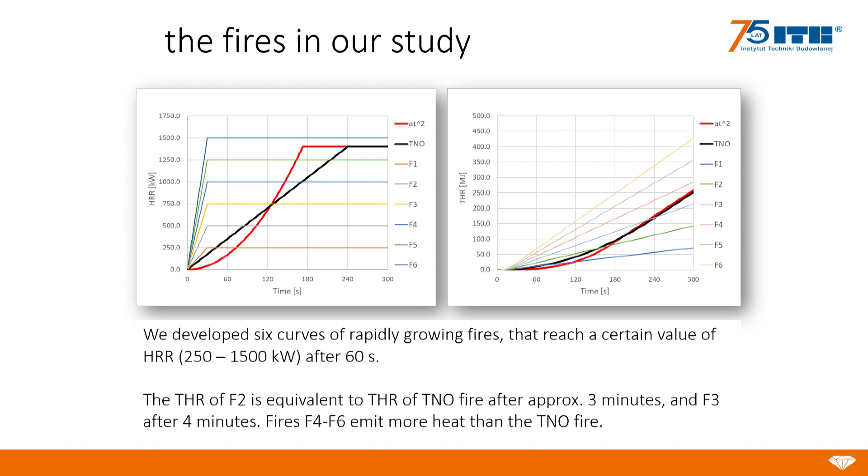We've designed curves of 250, 500, 750, and so on kilowatts that grow to the full fire in like 30 seconds, so it's almost vertical growth of the fire. And the fun thing is that 500 in terms of total energy generated matches 3 minutes of TNO, and 750 matches 240 seconds of TNO. So in 3 minutes they would emit the same exact amount of heat and smoke in the car park. It's just that one does it very quickly and flattens out, while the other grows.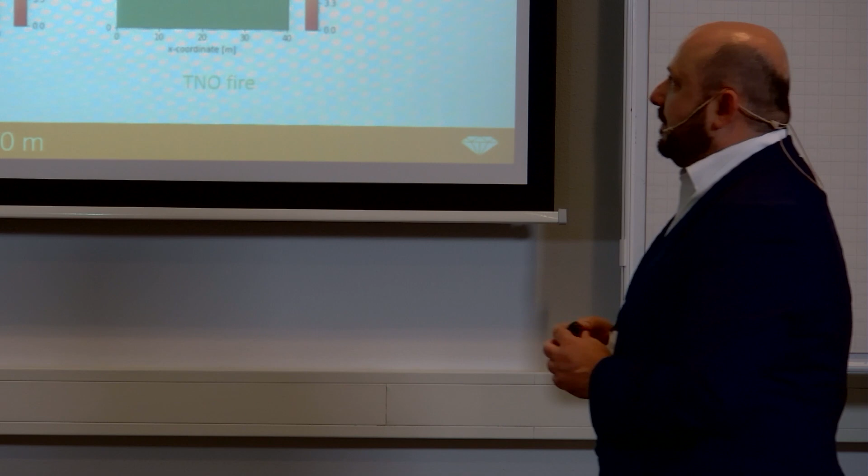So we've put those curves into our simulations to see how they go, and this is the result for a 2.7 meter tall car park. On the left you can see the 750 kilowatt fire that immediately grows, here's the alpha T squared, and here's TNO. You can immediately see that this one overcomes the car park with smoke much more quickly than the others, and the smoke is produced much quicker than in other cases. Previously for a car park we'd have more or less this outcome in a normal design fire, but here it can be much worse if the fire grows to a much bigger number.

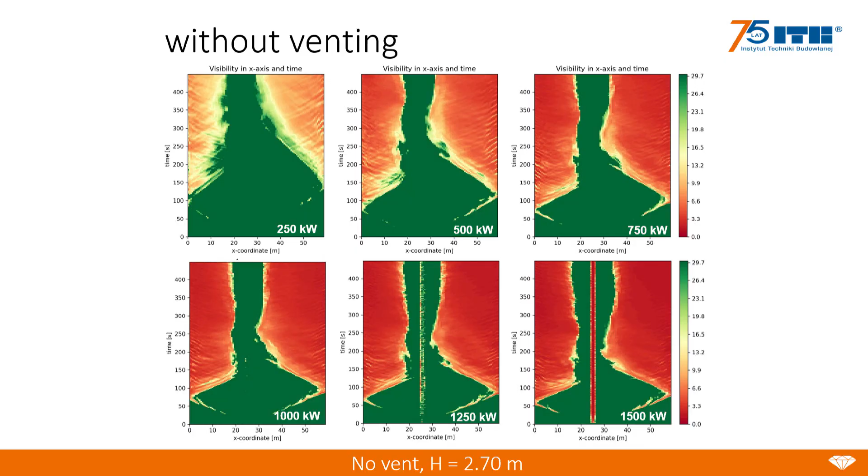What does it mean at this point? We don't know, because we don't know which of these heat release rates these cars actually have. From what I've been told by people from Sheffield and other universities that investigate this, they are at numbers between 750 to 1250, so somewhere in the middle of my graph we basically more or less got it. But it's not a definite answer, and these things overwhelm the system quicker.

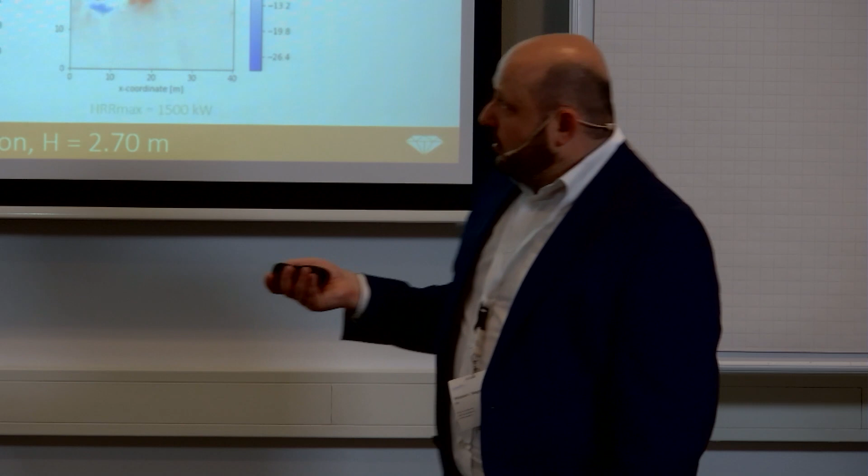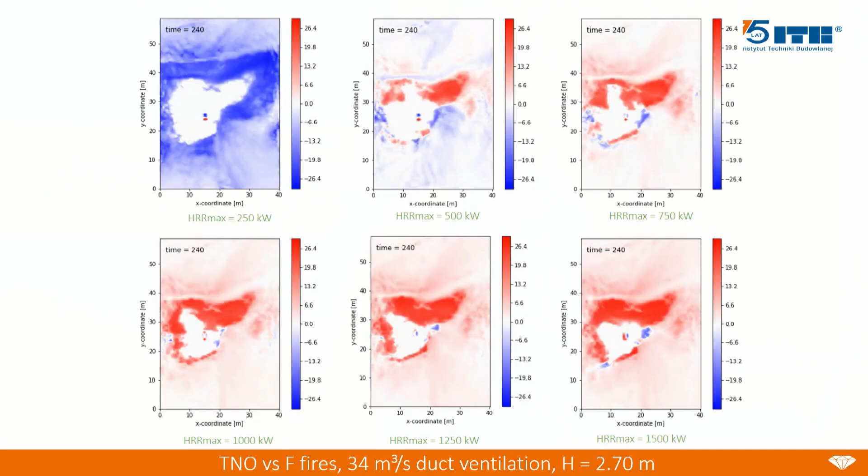Here's an animation that shows that, where it's like one simulation subtracted from another. If the color is blue, it means it was worse in the classical design scenario. If it's red, it means the fast fire was worse. So the 250 kilowatt case is mostly blue, meaning much less smoke, and the current design fire is more onerous. These cases are almost white, meaning there's not much difference between the current paradigm and the new one. And these cases are mostly red for most of the time, so the consequences in that car park are far worse than in the normal design scenario.

If you put a ducted system in it, the outcomes don't change that much. They are still very bad because of the reason I told you at the beginning - it's not that we can start them at time zero, you have to give it time. And because of the ductwork, you have a smaller smoke reservoir, so it's worse.

So the conclusion was that if it's around 750 kilowatts, if you end up with this fire as the electric vehicle quick fire, our current approach is working well. If it's smaller, then our fires are worse. If it's bigger, our fires are not worse, and the electric vehicle fire will be much worse for the outcomes in the building.

And here we have also observed this profound effect of the height in the building - really profound effect that increasing the height has significantly increased the capability to escape from that building with time, because it's a passive thing that is there. The smoke reservoir is there, you don't have to activate it, it's always there. So it makes sense: with larger buildings you can have a much better environment for a long time, long enough to escape.

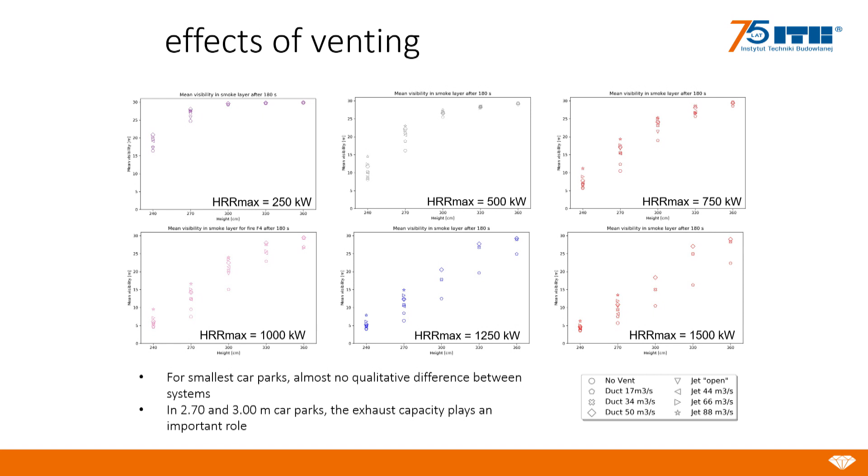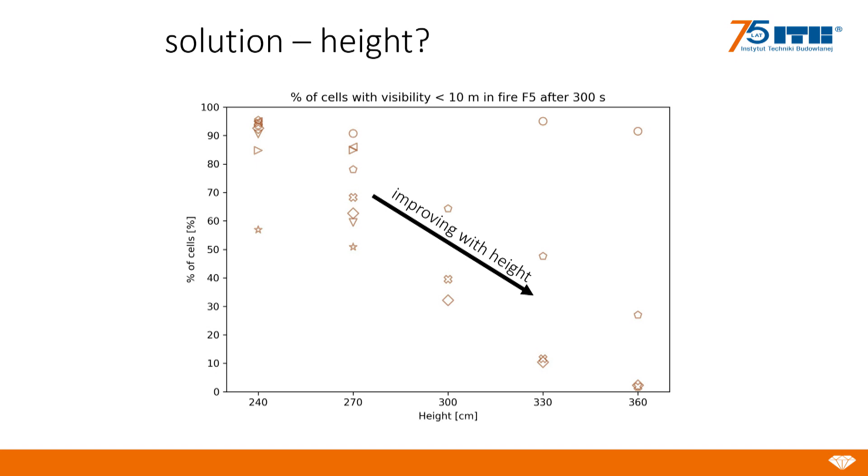So if you build 3 meter tall car parks, you not only possibly improve your ventilation system performance, but you also allow for escape in a scenario such as the fire of an electric vehicle that develops very rapidly. And here's 5 more slides about the same thing, because that's the main thing we found: the height of your car parks is the most important variable in designing the car parks and the systems in them.

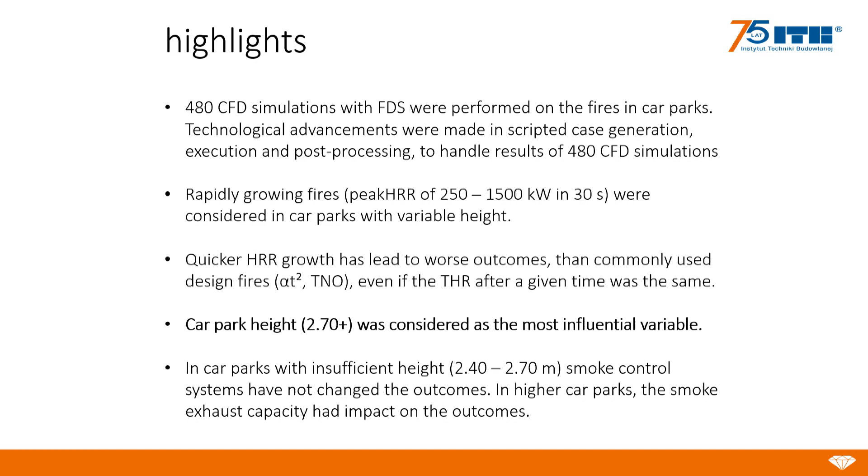So yeah, that would be pretty much it from the part that I've prepared, and because it was supposed to be a workshop, I would be very happy to answer the questions you may have about designing car parks. So if there are any, please go on.

I have a question. I understand it correctly that your discussion on 3 meters - is it the conclusion which is more related to the required safe egress time and the available safe egress time, for evacuation purposes, and not for firefighting purposes? Or is it the same?

It's in a way - for firefighting? No, the conclusion is more or less the same. It's better for both, because we've observed better performance of systems in taller car parks, which eventually affects the conditions for firefighters. So if you have a taller car park and your system is better at removing the smoke, the better the conditions you will have inside. So increasing the height will also improve the conditions for you guys. In Poland, the discussion was mainly towards the evacuation phase, because that's what our law requires us to provide. So our number one argument was: you have better times, better egress, you can have longer distances, because it translates to many parameters of the car park, like horizontal travel distance.

That's a big thing in Poland, like what is the maximum path you can have to exit of your building, and if I can increase it from 40 meters to like 80 meters, that changes completely the design of the car park that the developer can make, the amount of vertical routes and so on. So it's huge, they would trade 30 centimeters of the car park for the ability to have 2 less escape routes in it, because we could increase the horizontal distances.

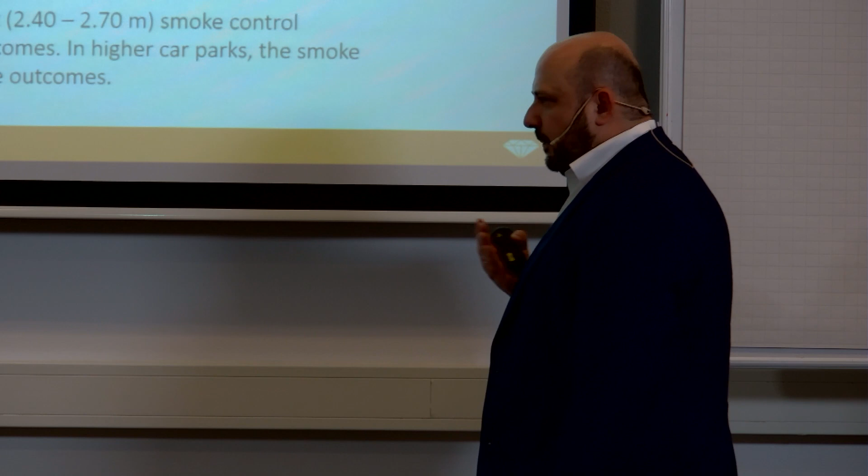And if you have lower radiation from your smoke layer, you have a lesser threat that the fire will spread quickly. If you look at the statistics, in car park fires you either have fires that involve 1, 2, 3 vehicles, that's the usual ones, or ones that consume like 10, 20, 30. You don't really find fires that destroyed 5 or 6 vehicles, because there's a cascade effect - at some point it just ignites the next car and the next car.

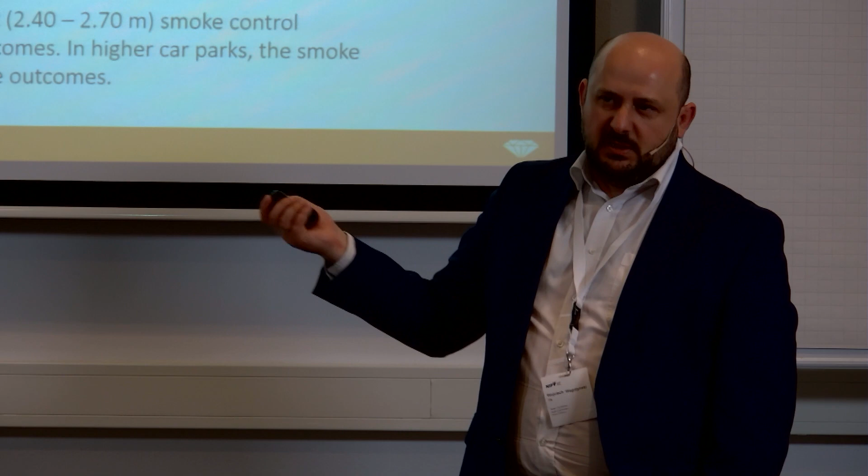I think you guys had such a fire at Schiphol Airport, an open car park, where it burned a lot of vehicles. So it was jumping from one to another, right? At some point - very close together. Very efficient.

Congratulations. I'm from Belgium. 500,000 square meters.

Yeah, you don't need CFD. No, but we had, for example, a fire at Zaventem Airport. I think maybe 8 or 9 vehicles burned there. So again, a very large fire.

And this is the type of car park we try to investigate now, to see how wind affects it. In essence, the project is about wind more than car parks, but car parks are just such a nice case study for wind effects, because of the way you can describe the fire of the car and how it jumps from one to another. So it's really interesting for us to see this dynamic and how it changes.

A couple of questions. Yeah, go on. First of all, thank you very much. You're welcome. The first question is about how these systems are activated - automatically? What is their strategy? Is it connected to smoke alarms?

In Poland, they would be automatic smoke control. Automatically, there's a scenario of operation: fire detected in a smoke detection zone means operation of smoke control in another zone, and I don't really see how you could do it without automatic operation and detection systems. I know, for example, in Australia they struggle because they don't have fire detection in car parks, and it's really crazy to put smoke control in there because you don't really know when to activate it. So what's the point?

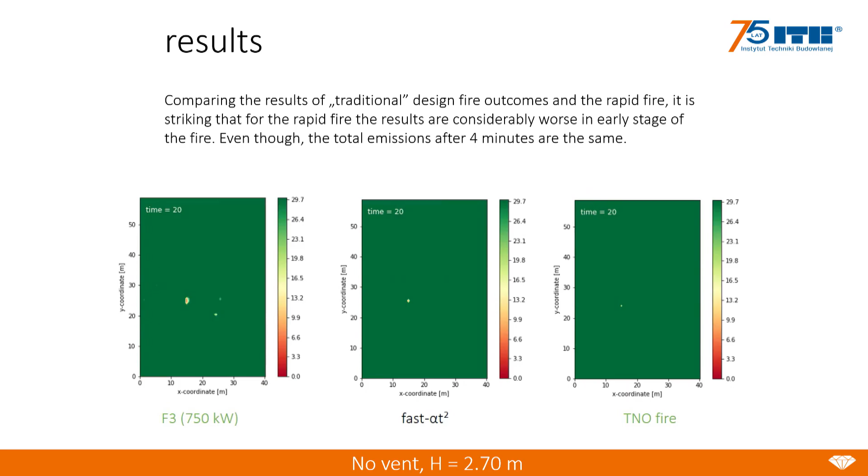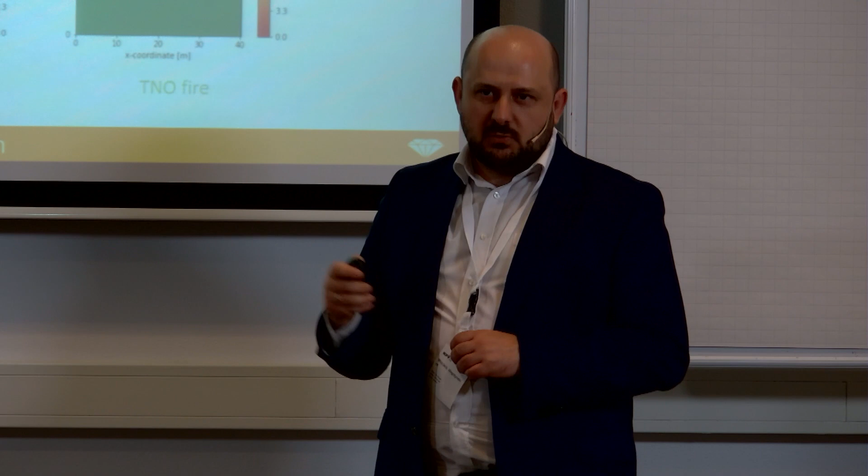And that's also what we've seen in that study. It's published in English — if you Google me, you can probably find me on ResearchGate, or you can contact me by email.

I can send it to you. What we've seen also in tunnels is that if you have vehicles, the section of where you're blowing air is changing. So if you have the same flow rate and a smaller area, you have a bigger speed. It sort of reduces the section. It's super fun in railway tunnels when the train occupies half of your section. It makes a really interesting dynamic.